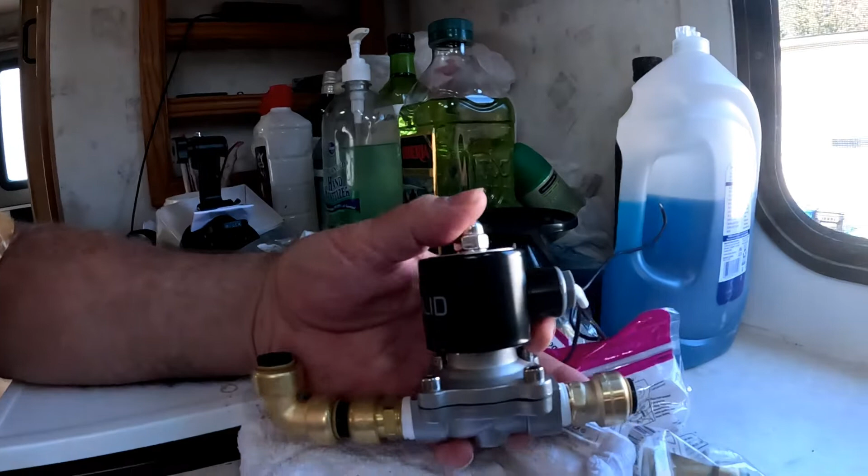Parts were $68 I think, well, let me take that back. It was $60 for the switch and the solenoid valve. Here is the solenoid valve. It is made by US Solid. It's a stainless steel body. I wanted to get something that would last really well.

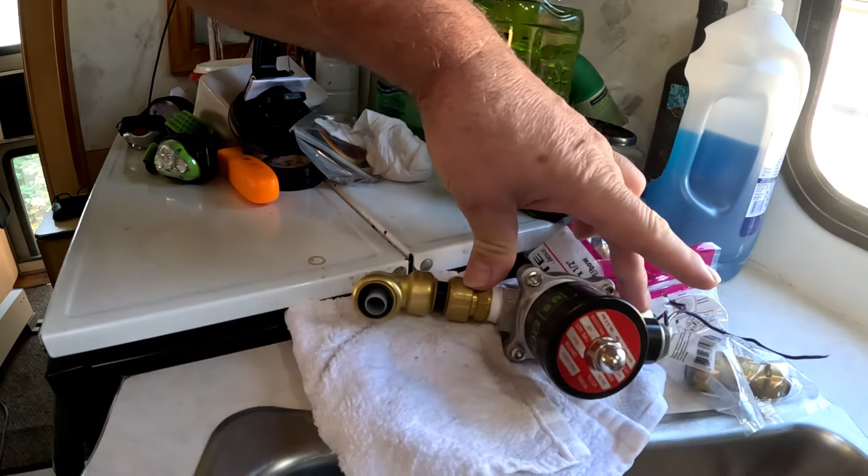And then we have SharkBite fittings, just because SharkBite is an easy fitting to use in this situation. I have 3 elbows, 2 male thread to half-inch PEX, and then I've got 1 T, and then a section of red PEX pipe hidden way back there in the corner. You can see it across the front too.

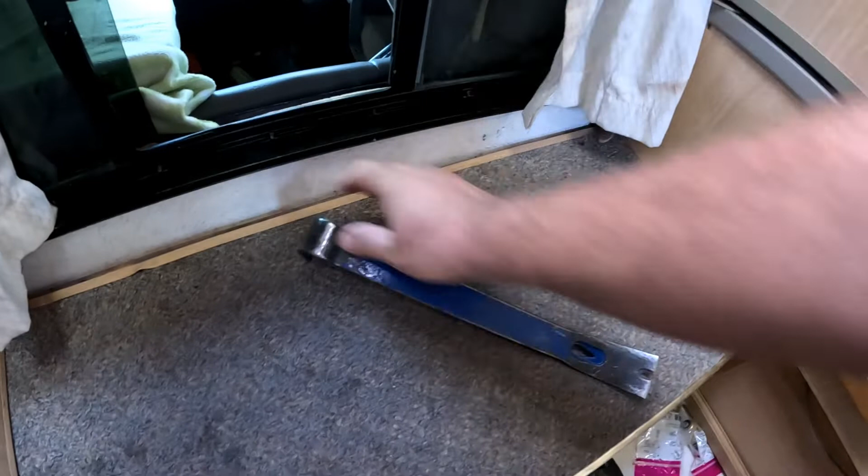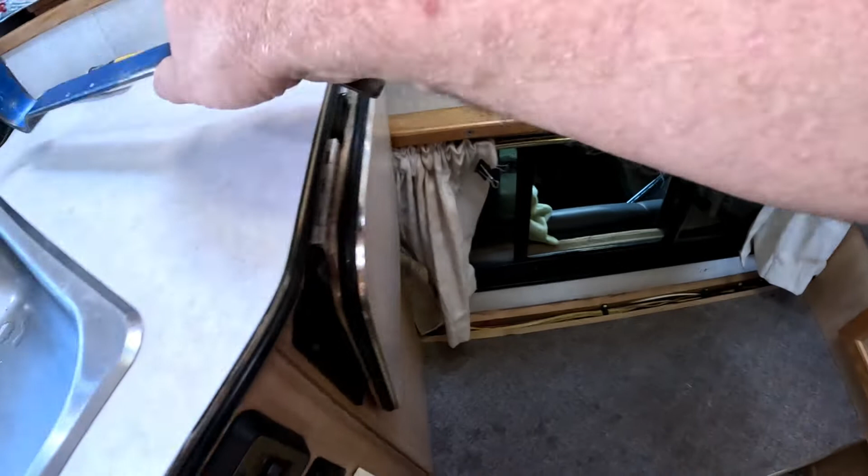First trick is to remove the step. The step has 1, 2, 3, 4 screws in it. Then you have to get up here and move the step out. Unfortunately, it's a pretty tight fit, but with a little persuasion you can get it out of there. Okay, so let me see if I can pull this out here now. Almost got it. Okay. There we go, got it. So we can put the step out of the way.

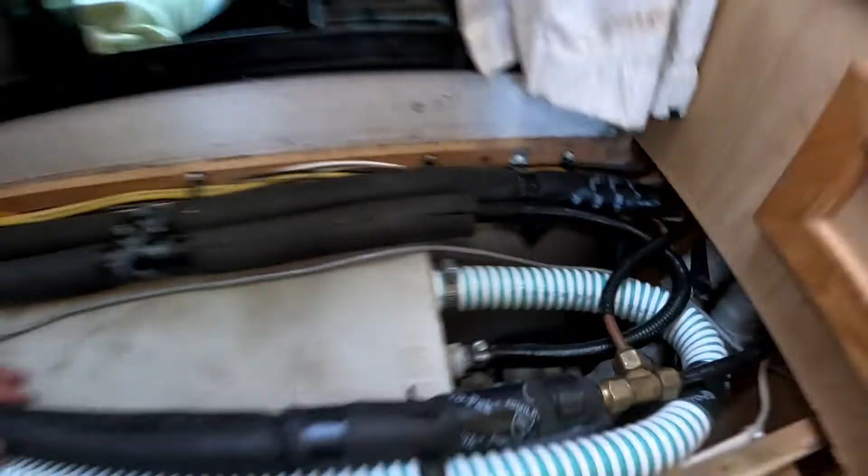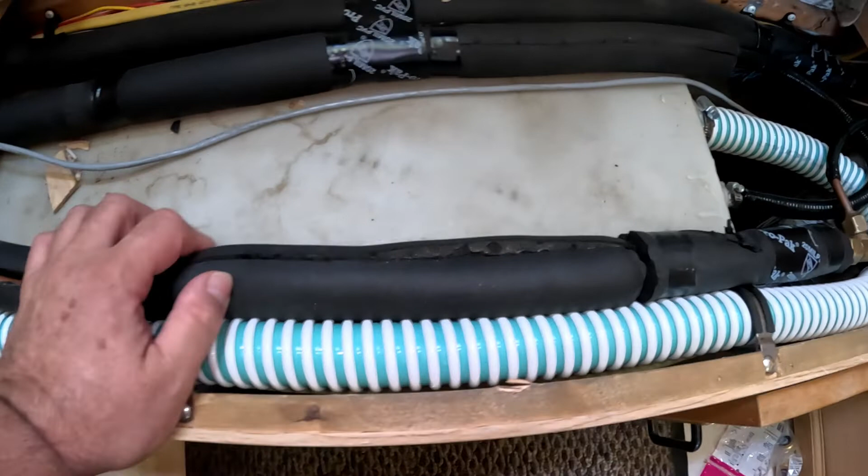Okay, these are the pipes that we already did. This is the vent line, and this is the city water connection. So if I connect up to city water, it'll go through here, and I have all these with the dense foam insulation over it. And then I've got insulation on the propane line here too, and that is just to hold the propane line in position so that it isn't bouncing around.

Okay, and then I'll just show you inside here under the fridge. If you can see back there, there is the outlet that I put in. The water used to be on this side, and I just didn't like having it on the right side because all the utilities are on the left side. So now I've got that outlet over here, and I can plug fans, radios, lights in over here while I'm camped and enjoy that, instead of having the hose connected up to this side and looking at utility stuff. So much more usable.

That return line is going to come down through here, and I think I'm going to drop it down either here or here, whichever works best. But the trick with this is, you see my shutoff valve right here. That is the shutoff valve to the drain for the tank, and that pipe goes out the back past the back end bed of the truck and then drains out onto the ground.

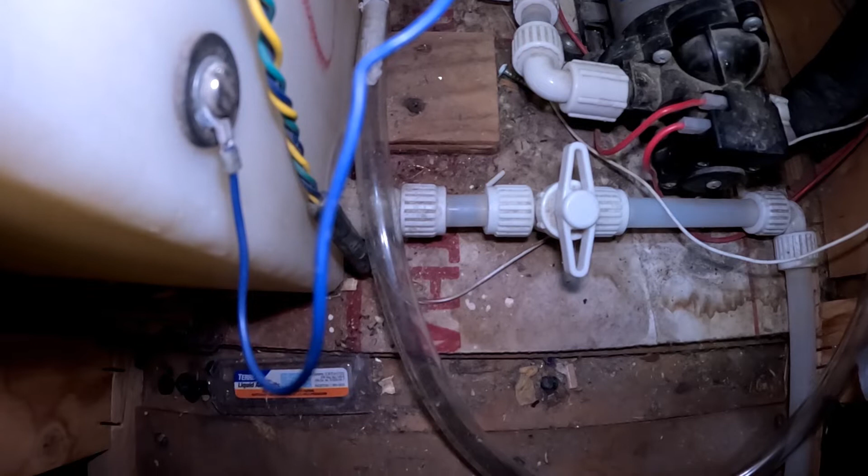And so right now the tank is totally drained, and what I am going to do is try to reposition these things. The T for the connection is going to go here in this area, and then it'll come up and over to the kitchen sink faucet, and then to get around that pump I might have to turn the valve here 45 degrees toward me, and that way it won't interfere when I turn the valve handle.

But anyway, when that valve is closed, the water will just come from the faucet down to this and flow into the tank. And then when the drain is opened, the water will just drain out like normal. It'll drain down through the line from the kitchen sink, and everything in the tank will drain out too. So it'll work out really good. It kind of almost gives a double drain, an air break for the water in the lines.

Okay, so let us get going on this. I'll get back with you when I have some things to show you. I'm just going to undo the pipe there and turn it around, and then put my SharkBite fitting on it. Okay, and then the same in here. When I get the sink off, I will bring that to you too and show you what I've done. Okay, so I will see you in a bit.

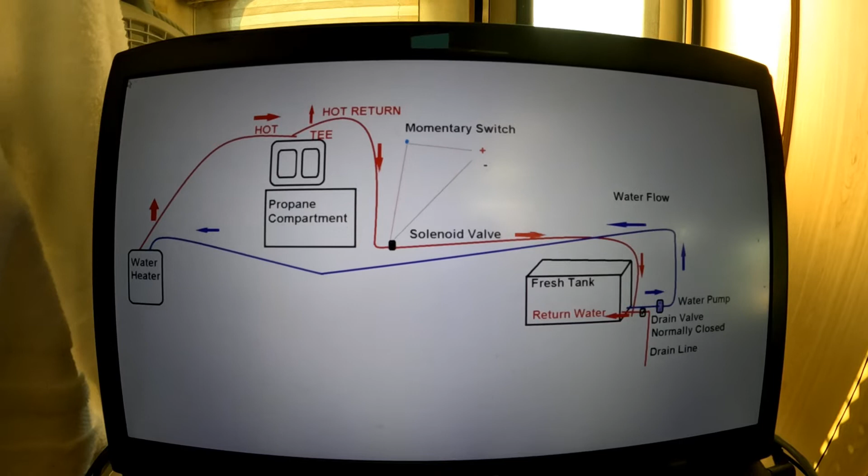Okay, so here's a quick diagram of what is going to happen here. So here is the sink up here and the water heater. Hot water from the water heater comes up here, and we're going to put a T here, and then there's going to be a line that goes down to a solenoid valve here, and then that valve has a control button here that you have to push and hold; it'll only operate while you are pushing it. It's a momentary switch.

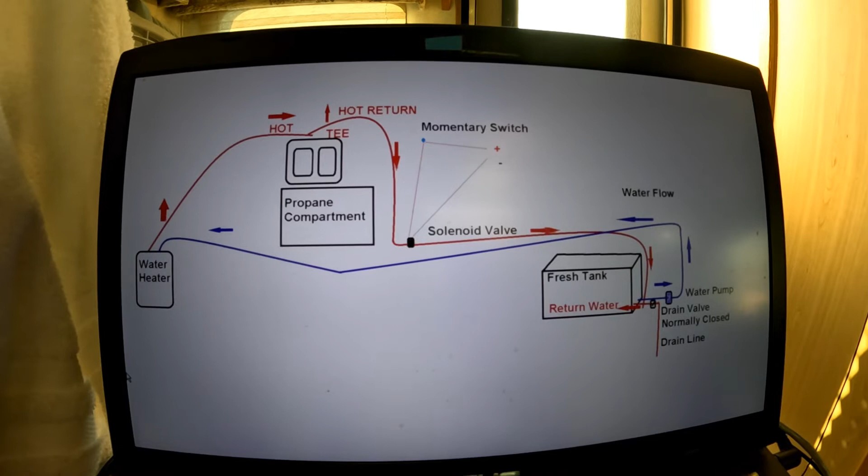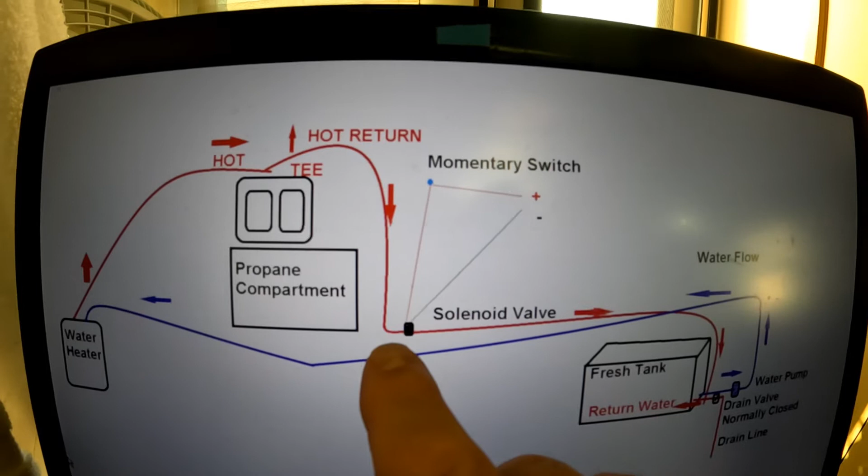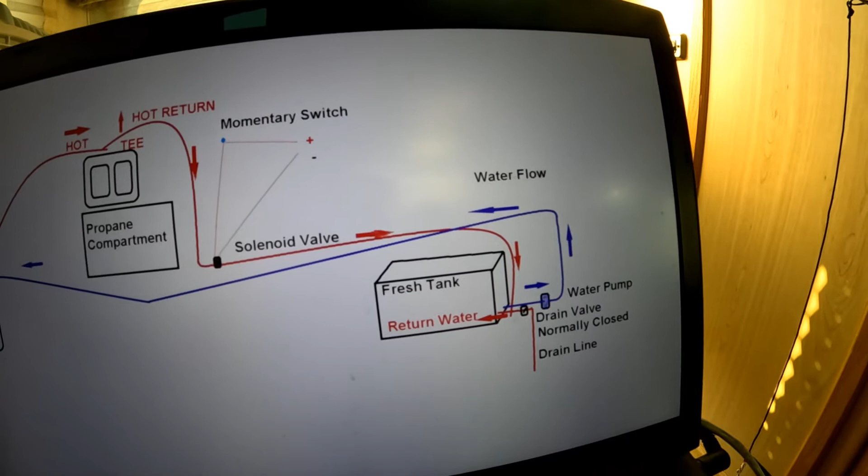So that will open the circuit for the water here. It'll make the valve open, and that will allow water to flow the rest of the way and back into the freshwater tank. And so when you open this valve, pressure behind drops, which kicks on the water pump. So that's one of the key things you have to do, make sure that the pressure in the system drops to make the water pump turn on.

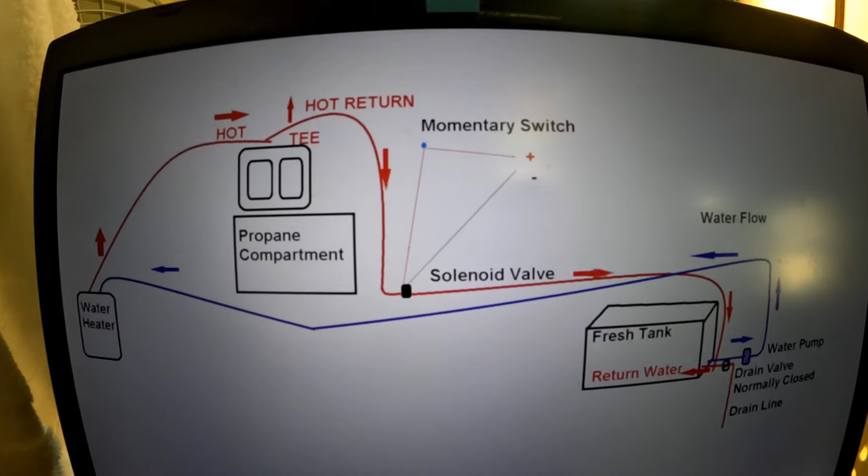So water will pump, go through the water heater, up to the sink, and then down through the solenoid valve and back into the freshwater tank. And that is how we get a recirculating line, so that we can get hot water up to the sink without wasting it down the drain. Okay, so you should be able to imagine your own system and put it together into yours. The trick is to get it from the kitchen sink hot water back into your fresh tank. Okay, so I'm going to start working on this now.

I have Miss Poppy helping here. Hi, Poppy. You being a good helper? She sees the cord on the camera, so she's interested in that. Hey, how about a sniff? Give a sniff. Good girl. She's still really active. Short attention span. Teenagers these days.

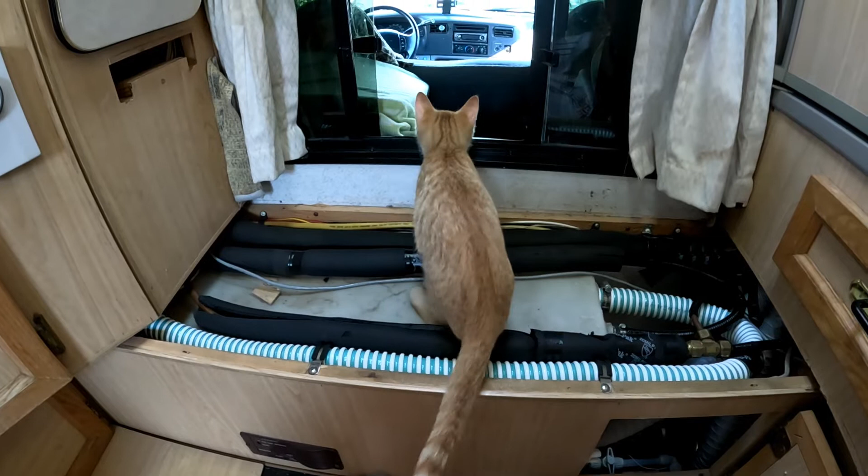Okay, so let me get started on that. I got to pull the sink out and run the pipes through here and make the connection down below. Okay, I'll get back with you. I had to pull out the breaker fuse panel, and that's fine though, because I need to get in here and connect the new switch for the solenoid valve. These two wires here, I need to hook up the power line for that. I think I'm gonna have to put the switch right up over here because I don't have any more room over there.

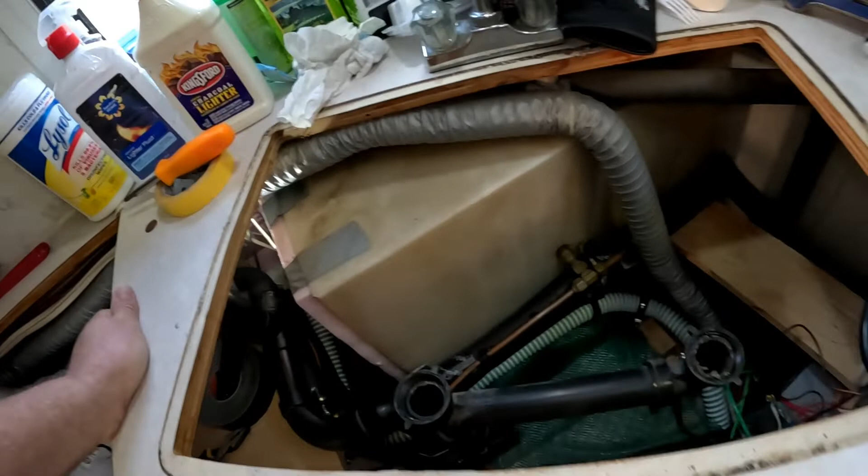Yeah, having this out is gonna make it a lot easier. Well, actually I'm not gonna pull it, I'm gonna put a, oh, what is this? Oh, that's a T there. Yeah, I wish I had another T, but I don't. Okay, so let me continue on.

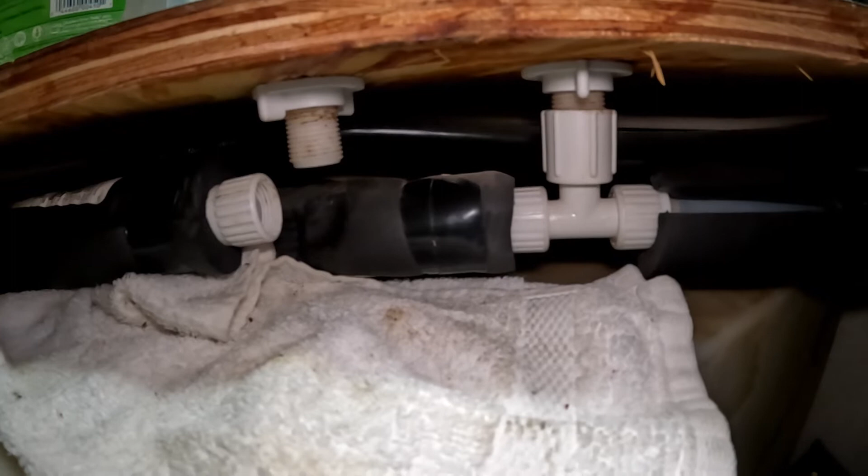Okay, so I am going to take it off for the rest of the day, but I was going to put a PEX T or a Shark Bite T here, but instead I'm going to try and locate one of these plastic tees where the side out is 1/2-inch pipe, and then it's PEX connections through. So I want to get another one here, and that will be a much easier way to make the connection cleaner looking and so forth. And then I can just come across and down and over.

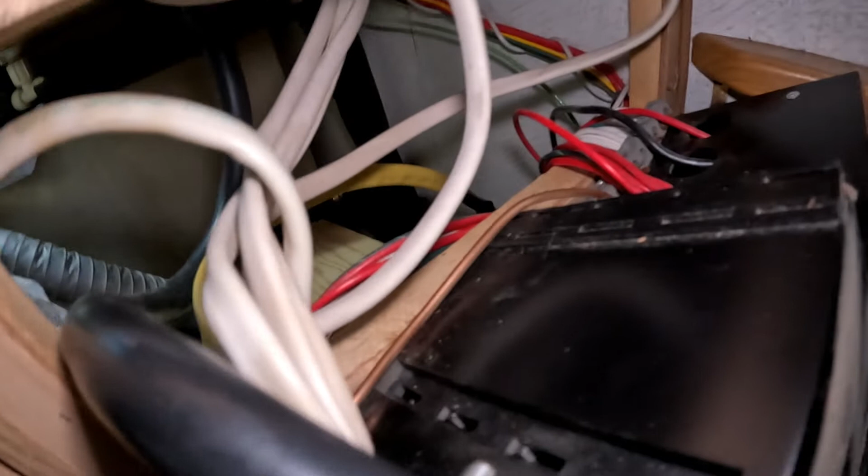So here is the oven. Had to pull that out to get access in here. Another thing I want to do is, you see this loop of wire, I'm gonna yank that out of the box and bring it under with the wire next to it, and then I'll be able to pull this electrical box out. You see how the wire wraps on there, and that's preventing me from being able to get the wire out for servicing. So I'll do that tomorrow.

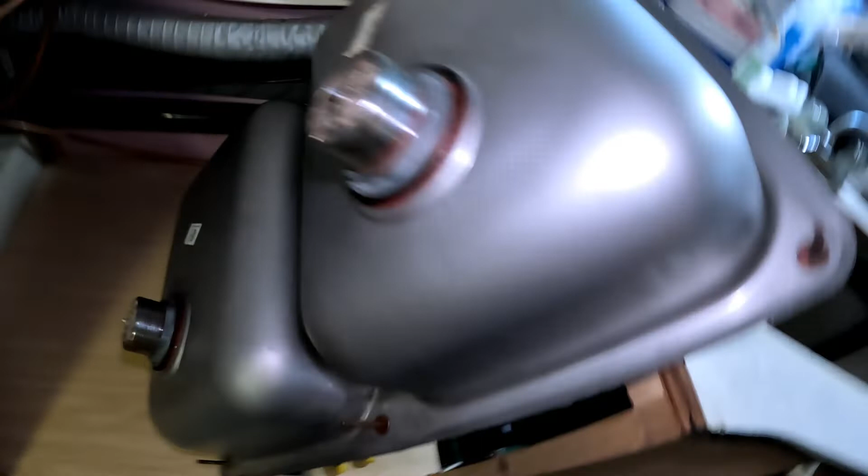And then also I took out the sink strainers here, and the way they had installed them is they put these rubber gaskets in here on the top, and the problem is that there was always water pooled. It didn't just roll right down into the drain. So I took that off, put the rubber gaskets on this side, and I've got some silicone sealant in there. So I'm just going to let the sealant dry overnight, and however long. I'm in no rush to put it back together. My propane tanks are turned off. Here is the propane line that feeds the oven.

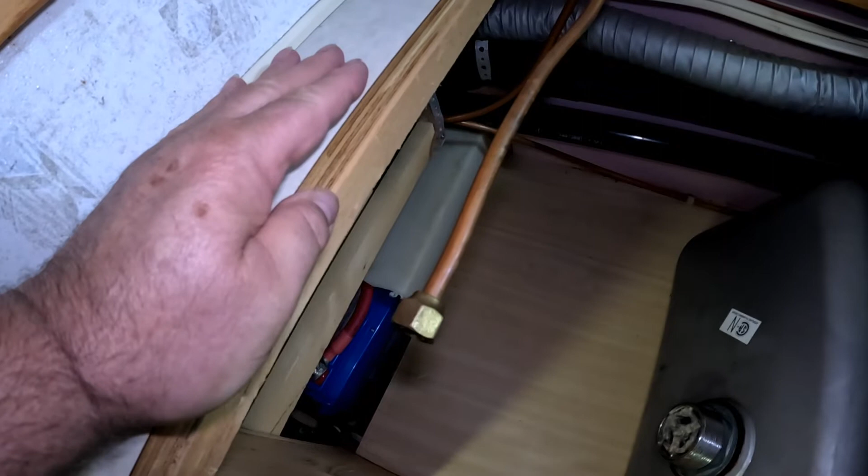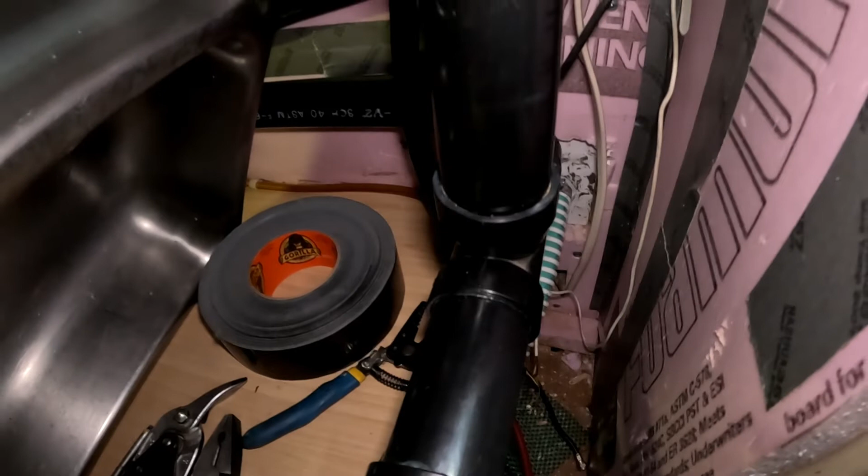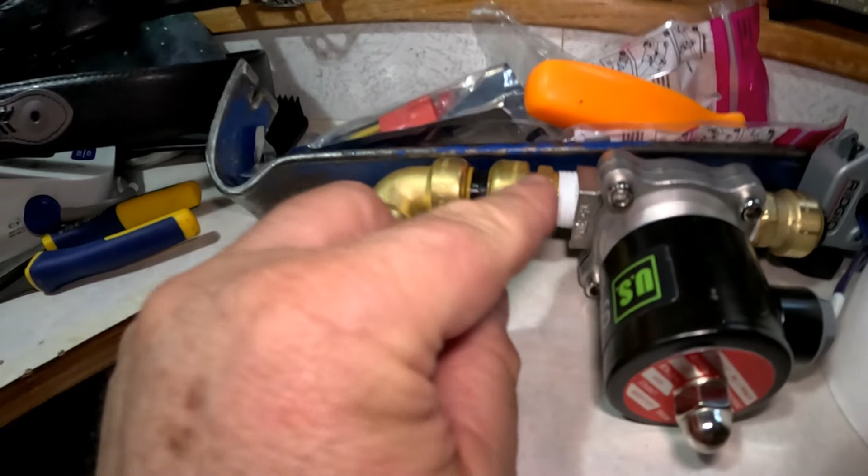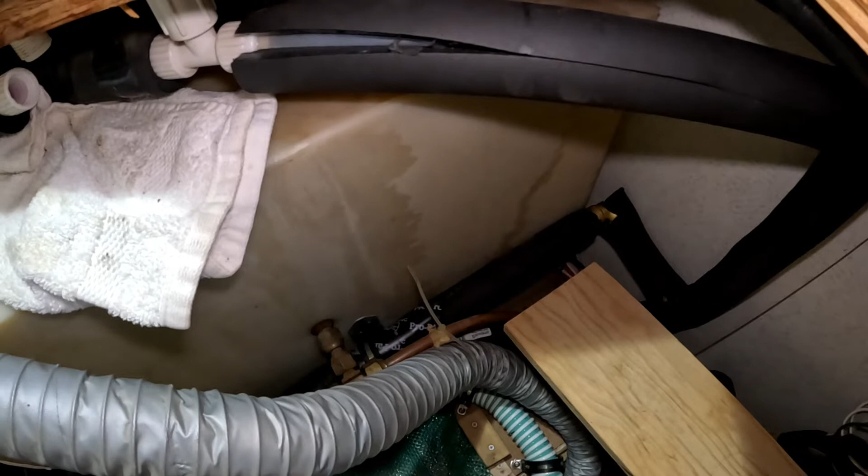Let me see. And then the other thing I'm going to do is I've got this here. I didn't really know exactly how it was going to fit in there, but this is going to be better for me to get a 90-degree PEX fitting so that I can screw it in and then have the fitting coming up 90 degrees right off the valve, and that'll get me a couple of inches in closer to the wall where I want it to be. So that will take care of that.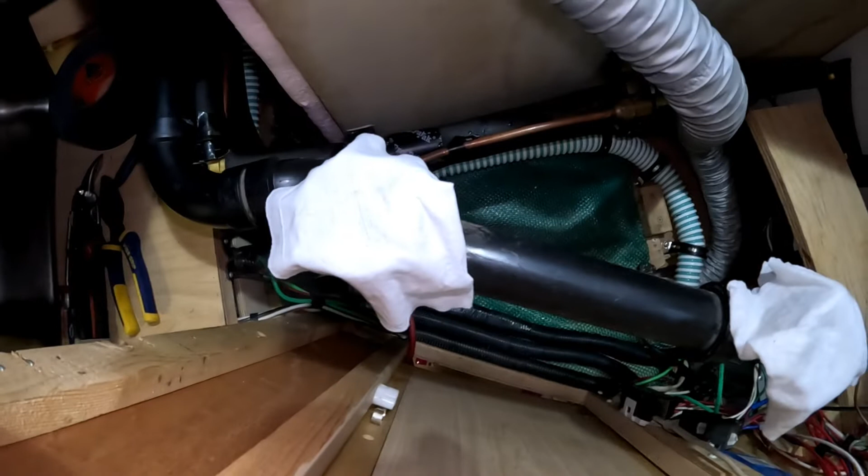And so I just have a couple of pieces of cloth over the pipes so that there's no stinkum in the morning when I come back out to finish up.

Okay, and then what do we have here? Why, it's Poppy. Hi, Poppy. We got a sleepy little girl here. Hi, baby. What a good girl. Don't kiss my hands. I've got junk all over them, so I don't want you licking my hands. She is a little sweetie.

Okay, that's it for today. And we'll finish this up tomorrow, second half of the video. All right.

All right, welcome back to the second half of the video on installing a hot water recirculating circuit for your hot water in the truck camper or in the RV. And let me show you how the completed job looks. All right, let's climb under the sink here.

So we have the sink pulled out, and this here was the key to it, getting a T-fitting up under the kitchen sink faucet. Let me see if I can get down there a little farther. Okay, so here's the faucet here, and this here is called a swivel T. So it's got PEX, and then 1/2-inch female pipe thread here, screws onto the bottom of the faucet, and then there's a through line for the PEX.

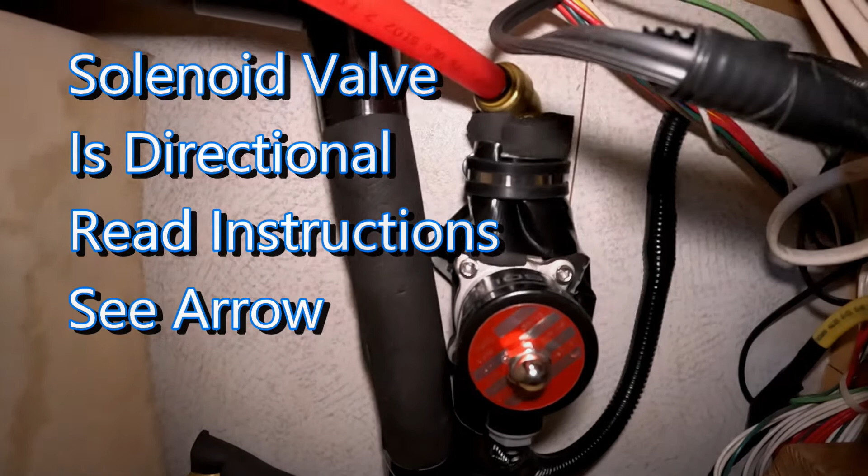Okay, so the hot water comes over here into a SharkBite 90-degree angle. And then there is a SharkBite fitting on the stainless steel solenoid valve. And there's actually one on each side of it. And then PEX going down below. And the PEX drops down below here. And you can see the tape on the PEX there.

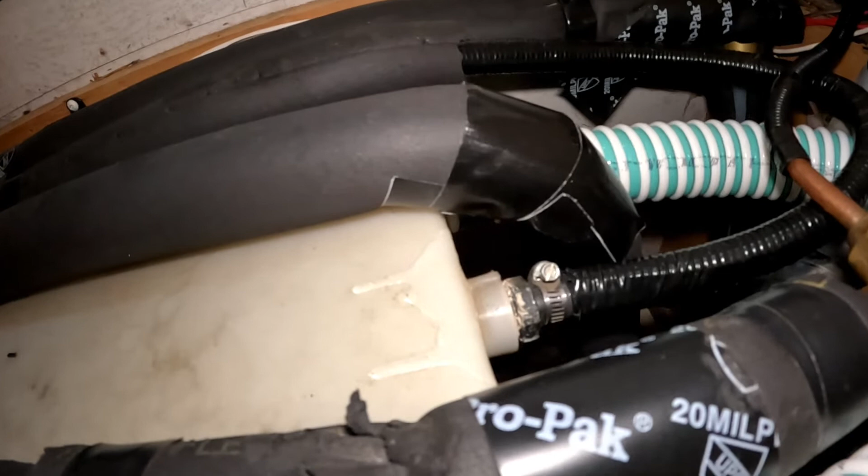And what I did for the PEX, it has some metal formed corners, 90-degree turns, and so I put a formed 90-degree turn under the sink there and another formed 90-degree turn here, and that way there are no connections. It just bends and holds the PEX pipe in position.

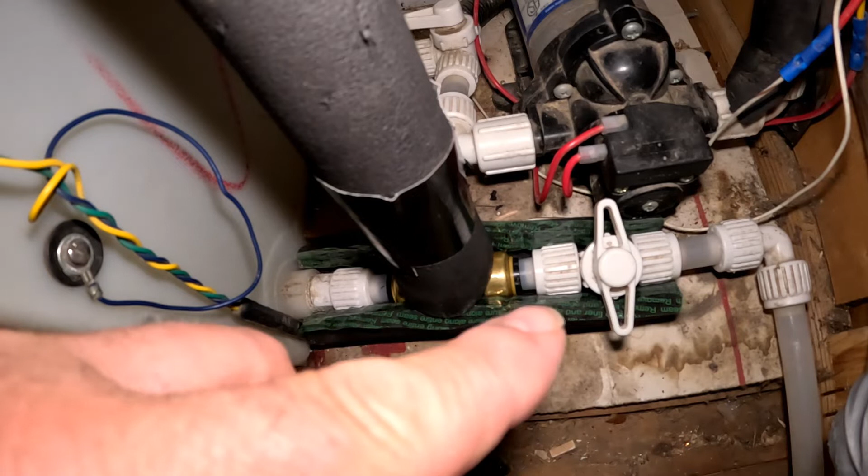Okay, then we come down here, and this is where we connect into the existing water system. So what I did was I pulled out the pipe that comes out with the valve. The valve was over here, and I needed the T to be on this side of the valve. So to get the room, I turned the valve around over to that side, and then I cut the pipe that was here, took out about 1 inch of it, because that's how much the PEX T is going to use without making the line over here extend into the wall.

And the hot water returns down into the PEX, and it cannot go out through the drain valve because the valve is closed, but it will go back into the main tank. So that works out very, very nicely.

Then let's go over here and take a look at the electrical part of it. So here is our control switch, and this here is a 10 amp rated momentary switch with an LED, and I wired it so that the LED is on when you press in, and you'll hear the pump kick on, and the pump continues running until the pressure builds back up. So over here you can hear the solenoid switch.

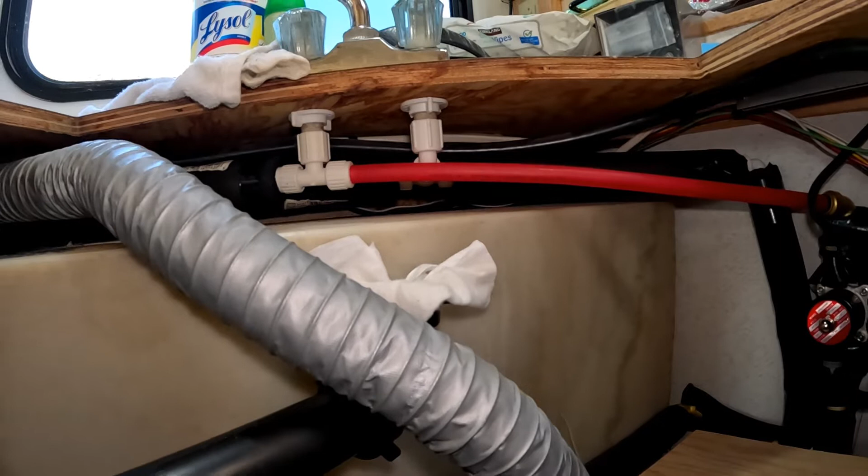Okay, so it's only on when I hold the button in. So all you need to do is hold the button in for 5 or 10 seconds, and that will bring hot water up to your sink, and then you do not have to let water run into either a pot or a bucket or anything to use for other purposes. You can just push the button, run it for 10 seconds. It brings hot water up from the water heater, and presto, you've got hot water at the faucet.

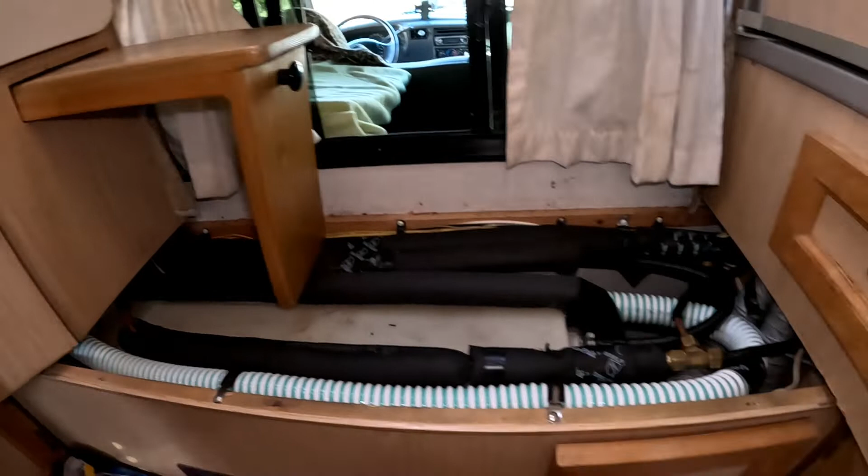So I'm really looking forward to using this, because I bet that I'm going to gain a day of camping every week because of the amount of water we save. Because I figure it's at least somewhere between a pint and a quart of water that we use every time we want hot water to wash our hands or wash dishes or something.

But you always have to wait for the hot water to get there, and in the meantime you've got cold water running, flowing down into your gray tank. And you can save that water for toilet flushes and all that, but you know, that's just stuff I don't want to do. So I'll push the button again here, and you'll hear the pump kick on. And that's about all we need to get hot water up to the kitchen sink.

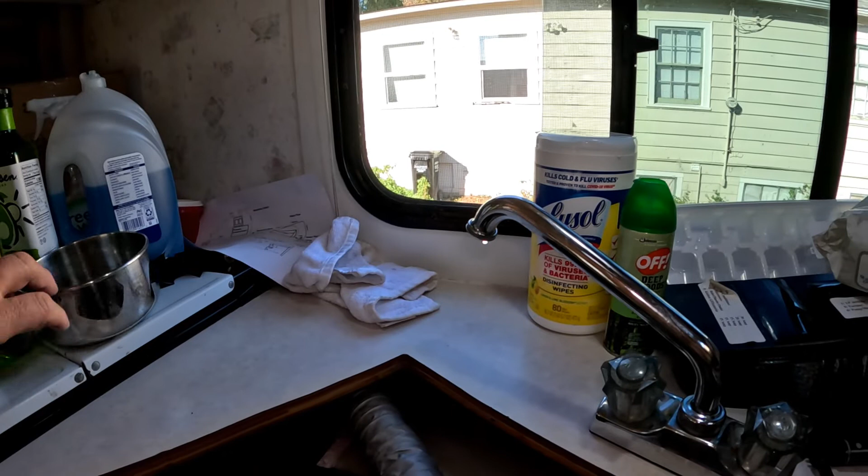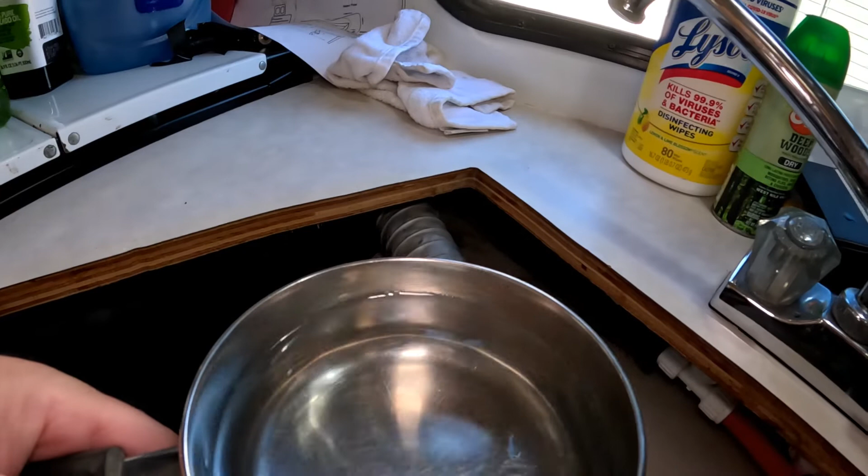And so as a demonstration, I'm going to hold a pot up here, and we're going to run the pump for 5 seconds. All right, so here we go. Let's get 5 seconds of hot water running. 1, 2, 3, 4, 5. Okay, so there you go. That's a pretty fair amount of water, and that is water that is no longer going to be wasted.

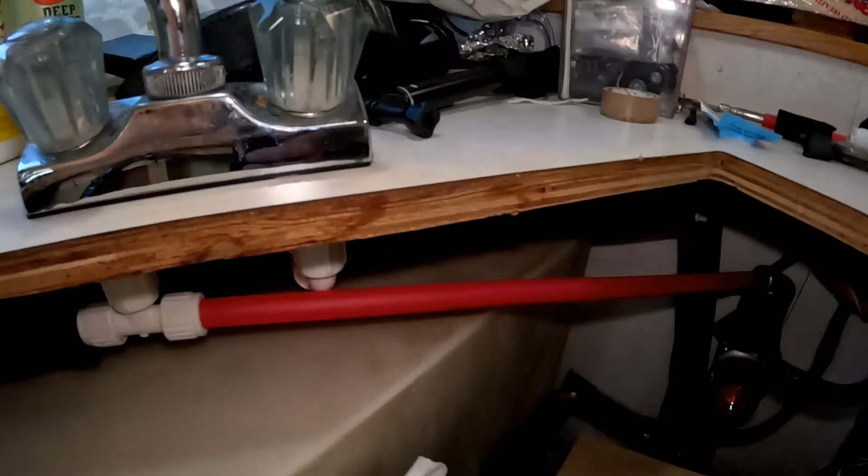So now I just got to put, watch your step. I need to put a piece of insulation on here. You see I have all the pipes insulated, and to pressure check the pipe I hooked up the city water, because that's going to have typically a higher pressure than what the RV pressure is going to be. And so I had it hold for about half an hour, and no leaks, and that's a good thing.

And so what do we got for cost here? That was like $10. Not the angle, but the other tee was another $10. Then the pump was $42, and the PEX fittings, I think I paid $80 for all of the PEX fittings that I used, but a bunch of them I'm going to return. I think I only actually ended up using 1, 2, 3, 4. I used a T, a 90, and 2 male pipe thread to 1/2-inch PEX couplers. And so that's probably about $40 of fittings.

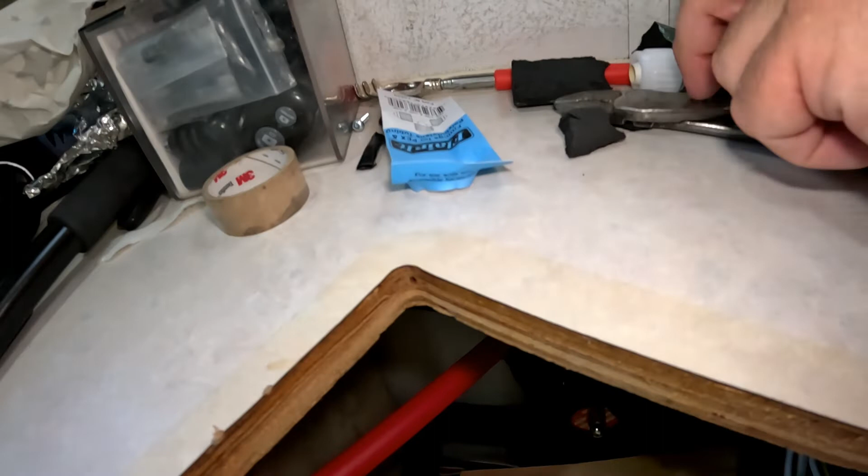And so then also I have this one leftover extra. I don't remember what this came off of, but we no longer needed this. Yeah, that's what it is. This is the one that came off of the cold, and so I used the 90-degree for that, and then the regular 3-way PEX T over on the other side to run the cold water straight on through there.

So for wiring, we went into the back of the fuse box, and there were an extra couple of circuits in there. So you see I've got a 15 amp fuse down at the end, and then I've got some 14 gauge underground cable that I used for the wiring. It's low voltage wire, so it'll work just dandy for in here. You see it right there. It's tough stuff, so I'm not going to worry about it. But yeah, 16 or 14 gauge stranded wire. It's good wire, and it powers the pump.

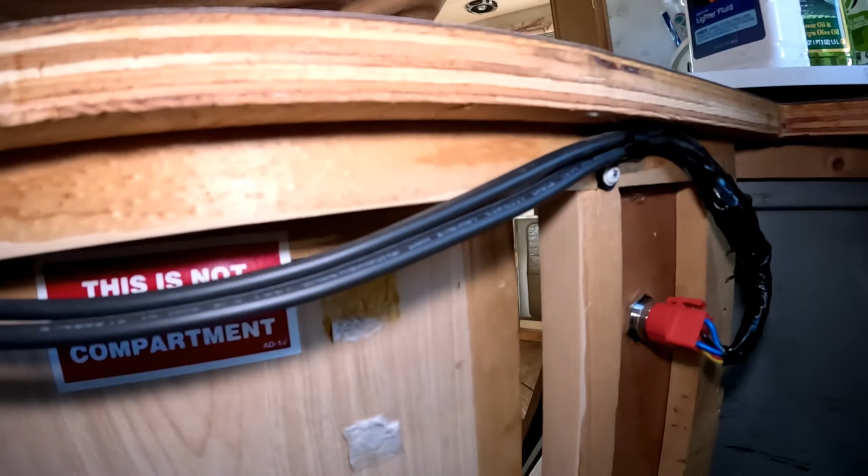And then I've got the pump wires inside of some split loom, and then the wires are tucked up under here. They come across and over to here, and then I've got this switch. You have to wire up the switch a special way to get it so that the LED comes on when you push in and then is normally off. And then you can also wire it so that it is normally on, or on all the time, or never on, depending on what your needs are. So what else we got going here? Yeah, I guess that's it.

So just in a quick review, you see how we have the plumbing come up here, moving the plumbing from the right side over here to the left side. The green is the fill hose. These are the two hot and cold lines there. Actually, one is the city line into the tank, and the other one is the cold line that goes back to the water heater. And then the cold line up here comes back forward from a grouping of connections back at the water heater.

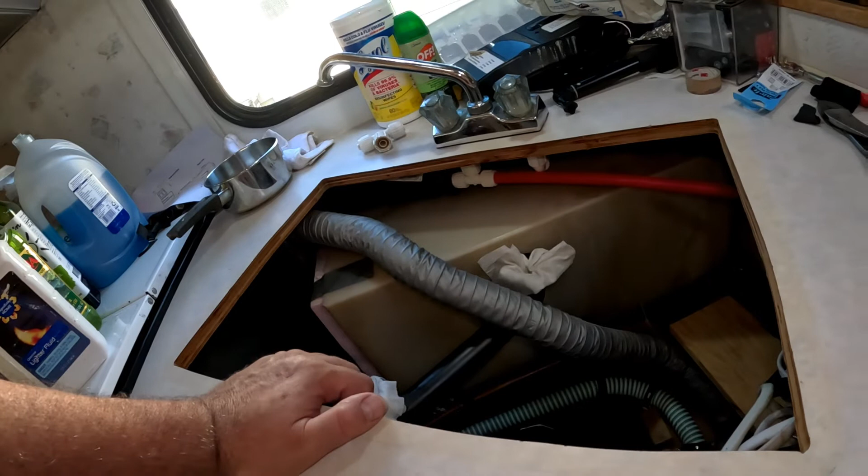So I need to get the step put back on. I need to put the oven back in. I need to take the oven out so that I can reach this wing nut, and I need to take the breaker panel out so that I can reach this wing nut to hold the sink down. And then otherwise it's not too tough to connect everything. Okay, so yeah, I'm very, very happy with this. It's working very nicely.

See that? I just saved another pint or quart of water right there. Cold water that went back into the fresh tank instead of down the drain.

Okay, we are going to time how long it takes for hot water to get to the sink here. This is the first time, so I'm going to turn this and start the timer at the same time. And 1, 2, 3, go. Okay, so we have hot water at about 6 seconds.

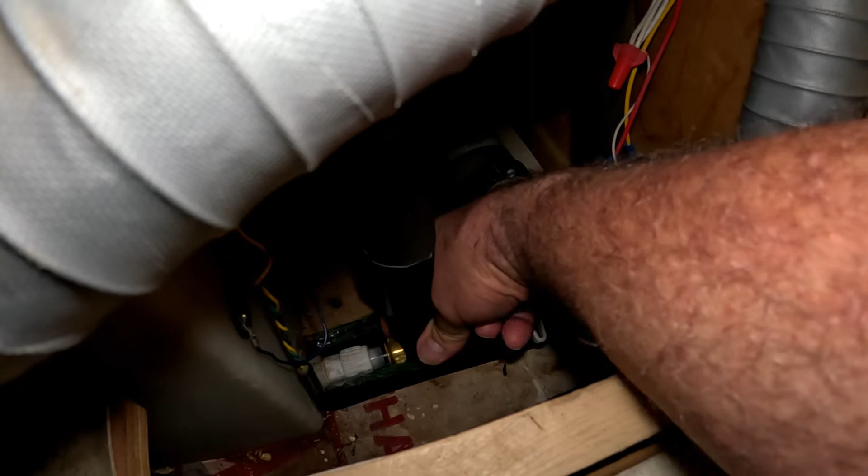Okay, now I'm going to go over here. Turn on the light and open the door. Then we're going to push the switch, and I'm going to see if I can feel when hot water hits over here. Okay. So it's another 4 or 5 seconds for hot water to get to that point. So close this back up.

Some people were concerned that hot water would get into the fresh tank, but that is pretty much not going to happen. So there's how much water we got running the faucet until we got hot. And let's see here, kind of gauge off of a plastic cup how much water is in there.

Hi, Poppy. That's my helper cat.

Okay, well that is 2 cups. That's a 16-ounce solo cup. So 2 cups of water, a quart. So that could easily turn into, over the course of a week, a couple of gallons of water that would just be going down your drain into the gray tank, and that's not productive.

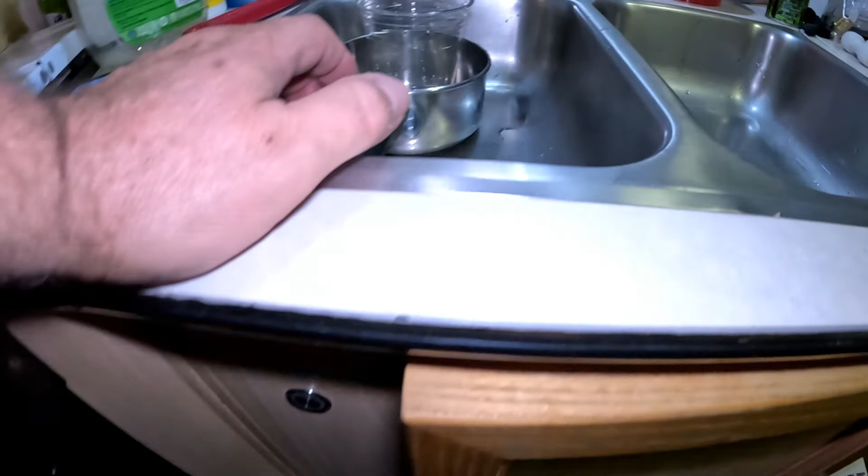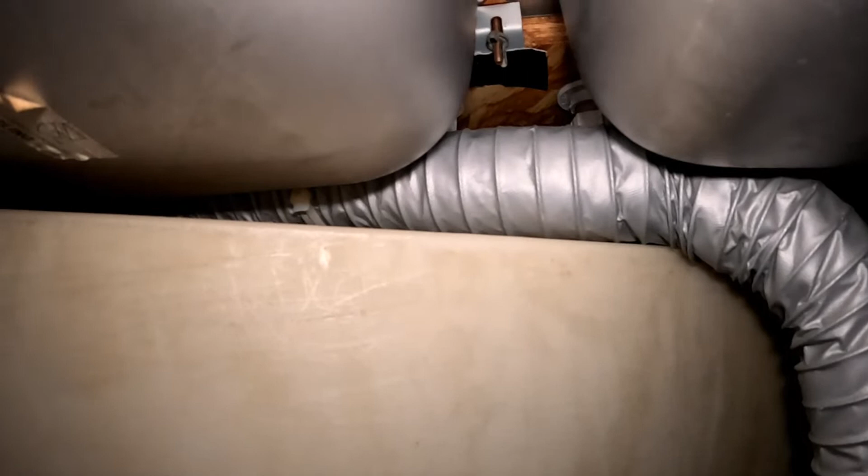So there you go. This works out really well. I got the water, I just press the button, pump kicks on, then I release the button, and then when the system pressurizes up again, the pump shuts off. So it's a good deal. And once again, just looking under here, you can see there is the pump over there, and there is the T that makes it all possible, buried up behind there now.

Okay, hi Poppy, there's a good girl.

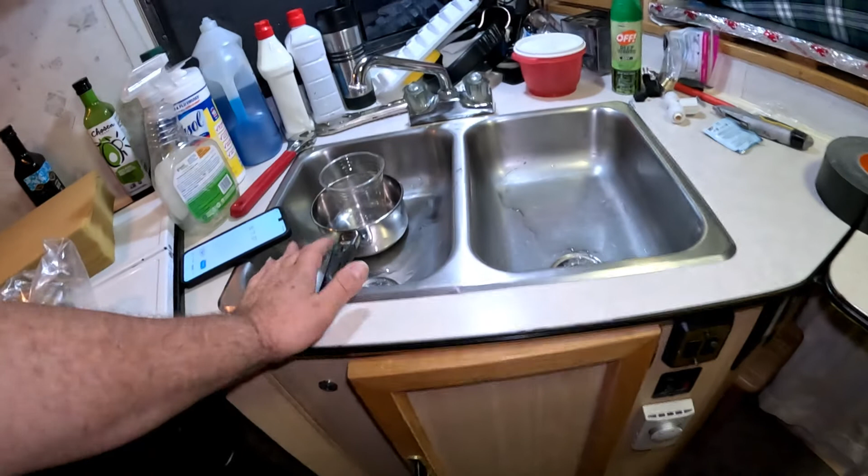Alright, well good, now I can get back to cleaning up the truck camper. So, very good project. I'm very happy with this. It could add up to a whole nother day of camping and maybe more, just because we're recirculating and saving water from the hot side.

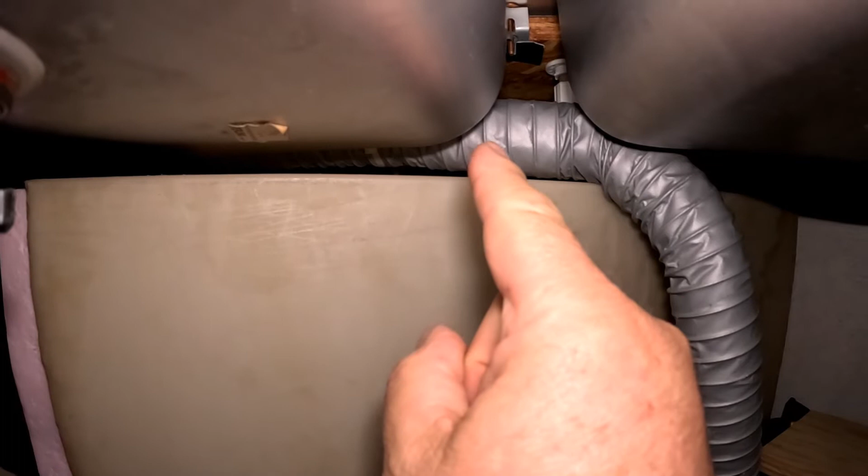So I'm going to give you just a real quick little summary of what we did. Now it's a little bit hard to see because everything is reassembled here, but we had the 90-degree over here on the hot, which were removed, and then we had a T over here on the cold. So the most efficient way I could have done this is to have taken the T from the cold and put it on the hot, and then that would have just run straight across over here, just the way we have it going right now.

And then the 90-degree that was on the hot, remember I had to put it over on the cold to a 3-way PEX T, so that it was offset from the hot, so that they could run parallel to each other. And so here is the cold line coming down on the left side, and the hot side is coming down through that stainless steel solenoid valve. And remember, that valve is directional, so you have to check which way the arrow points and install it so that the flow of the water is going with the arrow, okay?

And then we routed the plumbing down through here, and you can just see the turn of the pipe there. You see the black tape on the pipe, and that has that metal formed elbow on it. And then we had another formed elbow in here.

And then we took apart that section there from the tank over to the elbow, and we took the valve and turned it around to the other side so that the new PEX T could come down where it is now, and that lets us flow the water back into the tank.

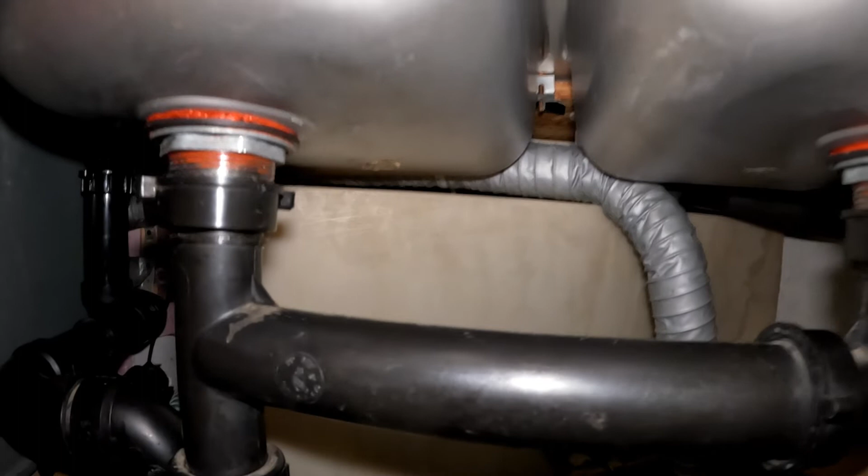Okay, so that is basically what we did here. I was able to reuse the 2 parts off of the sink, the T and the elbow, and then buy 1 additional plastic PEX T. Then over here we bought the valve and the 3 PEX fittings over on this side, the 2 half-inch pipe male pipe connectors, 2 half-inch PEX, and then a 90-degree PEX elbow.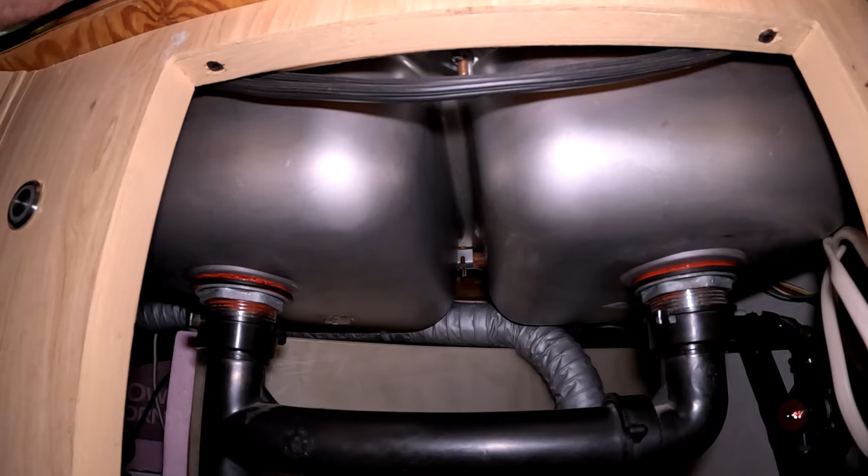Then over here is the switch location, and we wired the switch in, and we had to buy some underground cable, 16 gauge or 14 gauge cable, and that was a 75-foot roll for, I think it was $50 or something. And so here's the button on this side, and the LED is off, and when you press it, the LED comes on, and that way the LED is on when the switch is live. So that made sense to me.

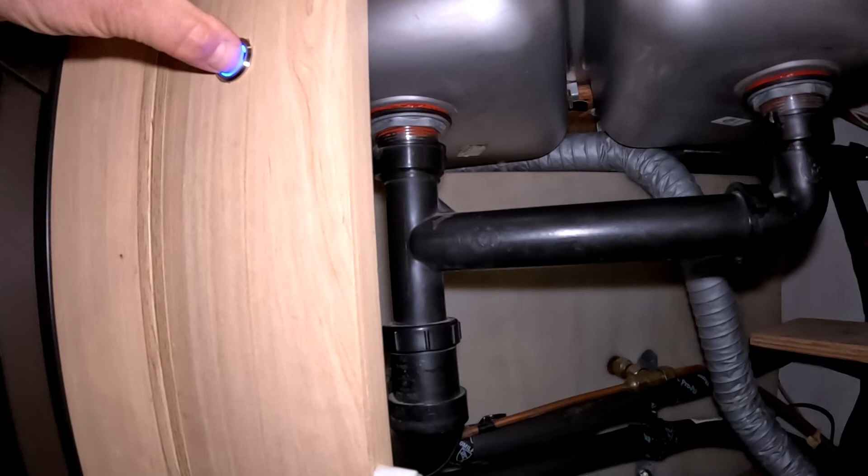And so when you push the button, it opens the valve and the pressure drops, which kicks on the pump and sends water through the system. And then you let the button go, the valve closes, and then the pressure builds back up, and then the pump senses that it's back up to pressure and it shuts off. So it works out very nicely. I'm very happy with the system.

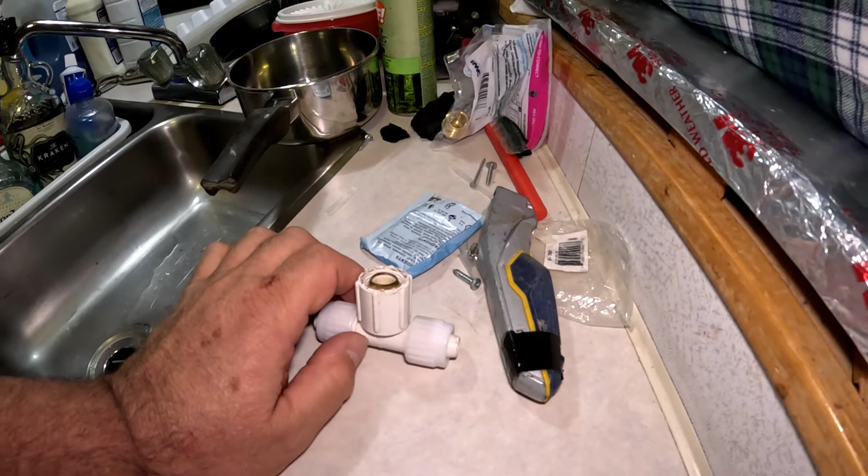So it ended up, I used fewer parts than what I really needed to, so I've got a few things that I need to return. Let's see, I did buy another one of these because I thought I was going to need two. So I've got a new one that's on the hot now, and this is the one that came off the cold. So I could have just taken this and put it on the hot, and then used a new PEX T connecting to the 90-degree elbow that came off the cold. So I could have saved a little bit of money after figuring things out and doing things more efficiently.

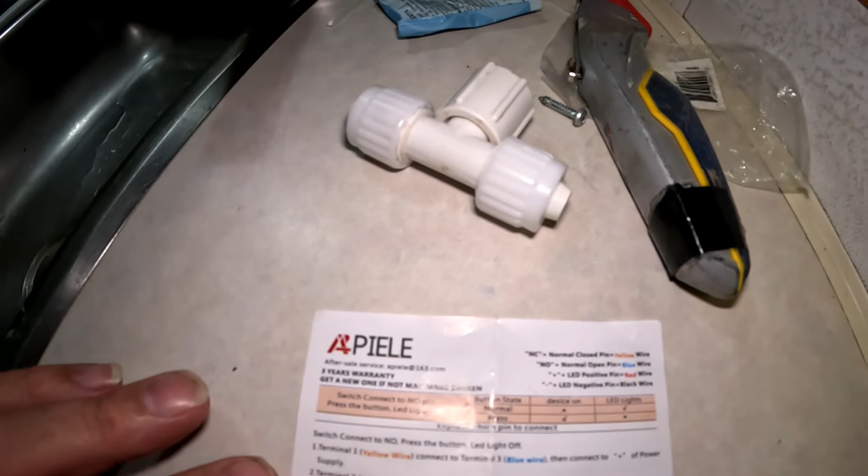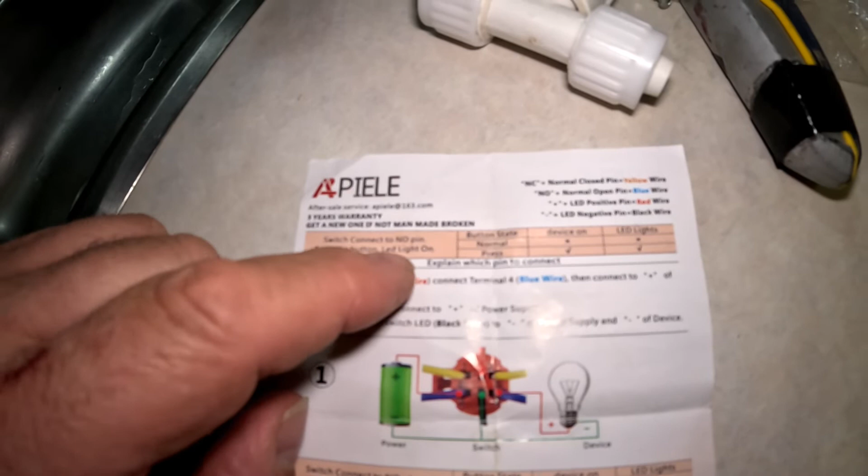This here is the switch that I got. It's a peel or a pile, whatever it is, 3-year warranty, and I used this method for wiring the switch. You see here, switch connection to normally open pin. Press the button, LED light comes on, and so that is the wiring method that I used for the switch. And there's 3 other ways to wire the switch in, and that was the way that worked for me.

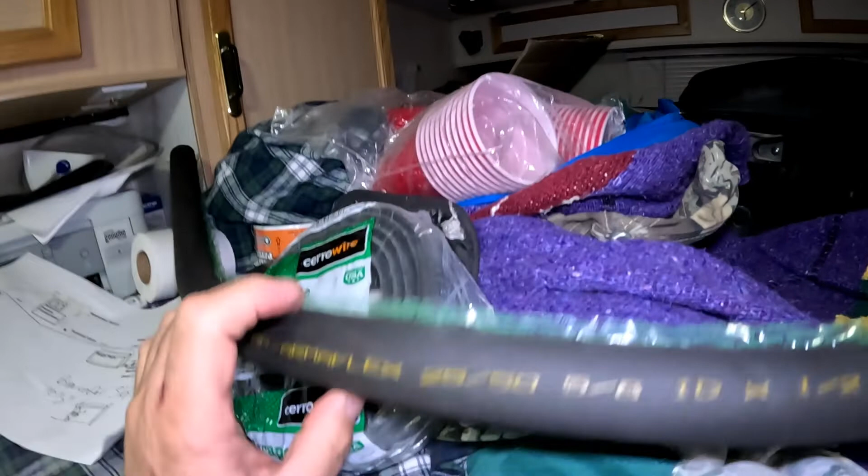This here is the wire that I used. So it's a 14-2 landscape low voltage cable. The truck camper is 12 volts, so perfect. This is the insulation that I bought. It's the denser foam Armacell Armaflex 2550, 5/8 inside diameter, 1/2 inch nominal wall, R 3.4. So it has a better R rating than the other foam pipe.

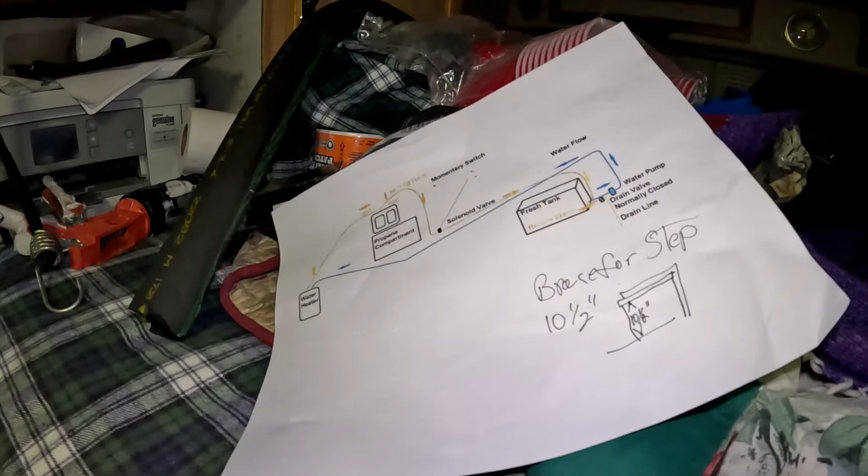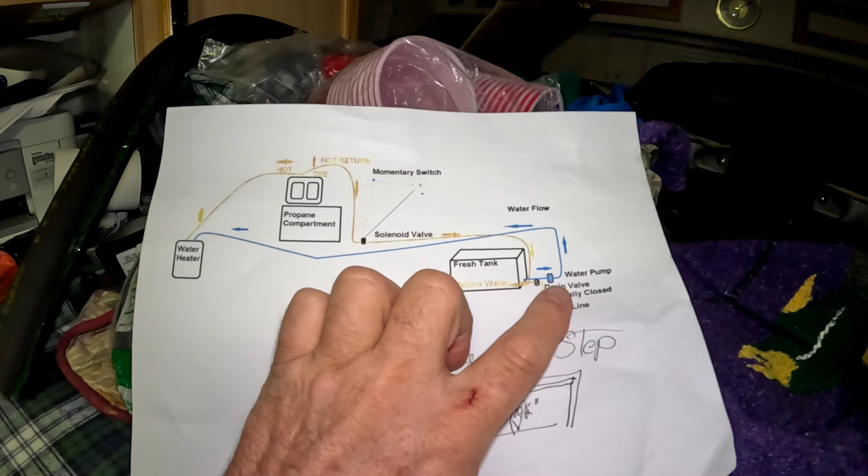And then this here is just the diagram of the setup again. So we have the freshwater tank. Water goes to the pump. The pump senses low pressure when you turn on the switch, so it pumps through the water heater up to the sink, and it just bypasses right through the sink in that new line to the solenoid valve. Make sure the valve has the directional arrow going the right way, and it comes back down here, and this one here connects up to the drain connection. And remember, we moved the valve for the drain out farther so that I could get a T in here.

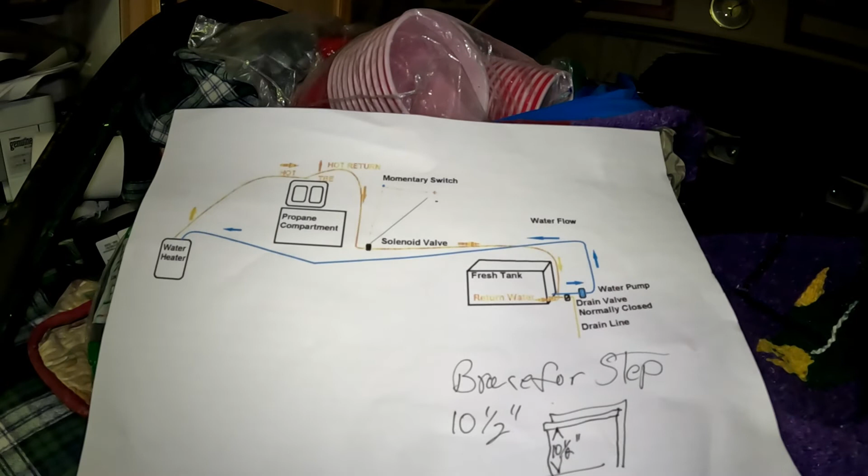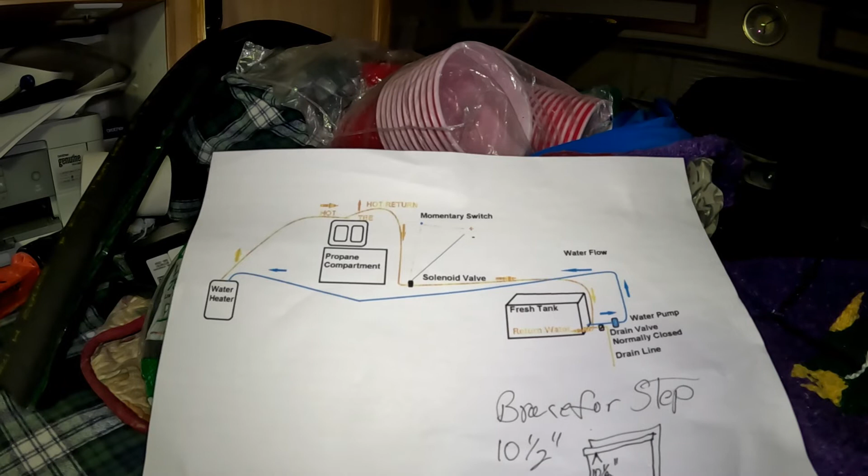But I didn't have space to put it here, but you could have also put it in the section of pipe coming from the tank to the pump. And what that would do is pump the water from the bypass line directly back through the pump and recirculate that way, so that it would have minimal mixing into the freshwater tank. And so that would probably be the better way to do it.

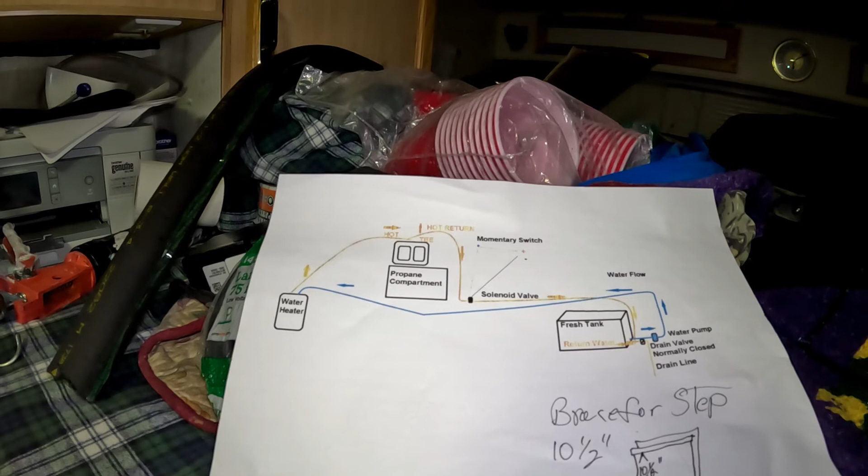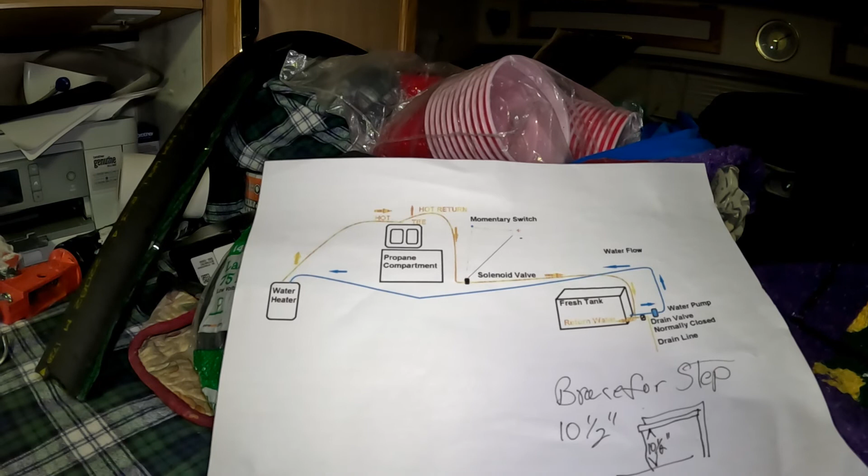The only downside is that your water pump may not like the hot water from the water heater. So there's kind of a trade-off, but you're only running the water until it's hot at the kitchen sink, so it only gets hot down at the fresh tank if you continue holding the button for, in this case, 12 or 14 seconds.

So that concludes this project. I'm very happy with it, looking forward to getting out and trying it out up in the forest, out in the desert, and I figure that over the course of a week, I should be able to get an extra day of camping in, because I will save about 2 or 3 gallons from going down the drain into the gray tank, because I don't have to waste water to get hot water at the sink now. I just press the button, turn on the valve, water goes through, and I have hot water and nothing gets wasted. So it's a good system.